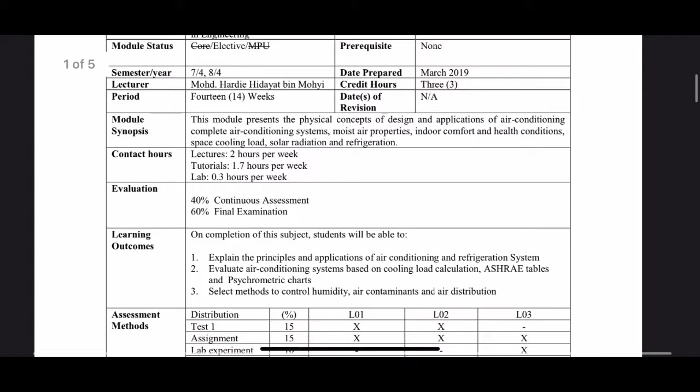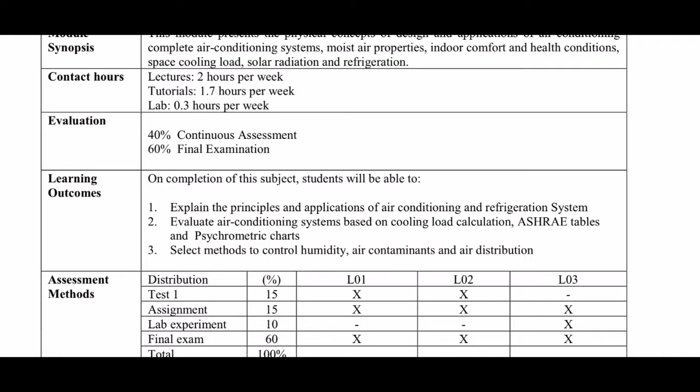Nevertheless, your learning outcomes are given there: 1, explain the principle and applications of air conditioning and refrigeration systems. 2, evaluate air conditioning systems based on cooling load calculations, tables, and psychrometric charts. 3, select methods to control humidity, air contaminants, and air distribution. This will be delivered via our lectures.

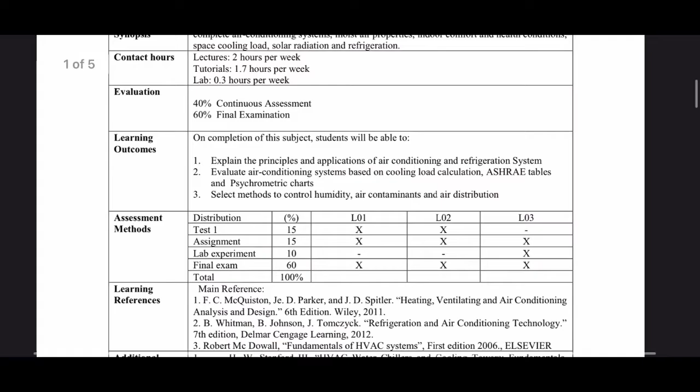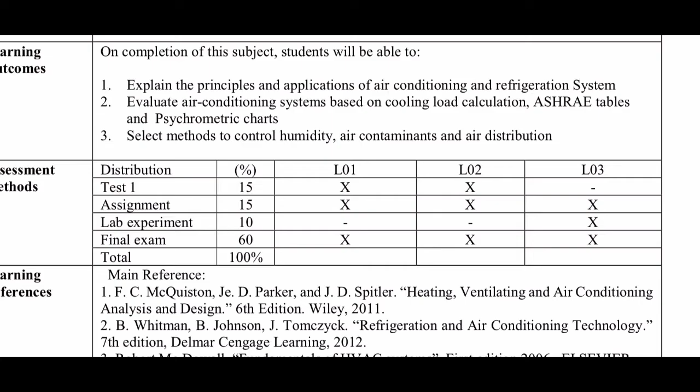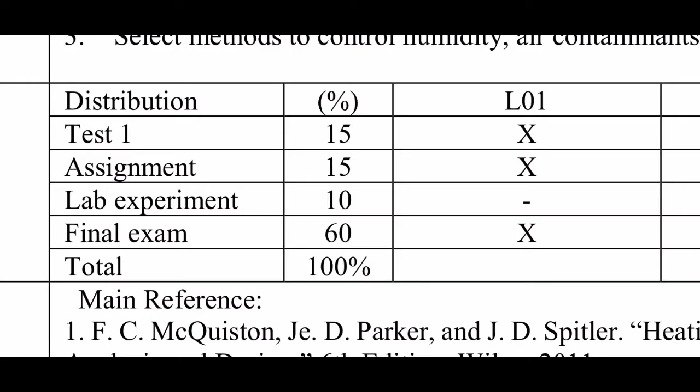You will have assessments. Now this is a bit tricky since I didn't change it. So what you are going to have is one test, one assignment, but this lab experiment here will be replaced by another assignment. So there will be no lab experiment this semester since you are the final batches. We will try to lighten your load by having another assignment. Both assignments will be done via group assignments, so test and final exam will be individual submission, of course.

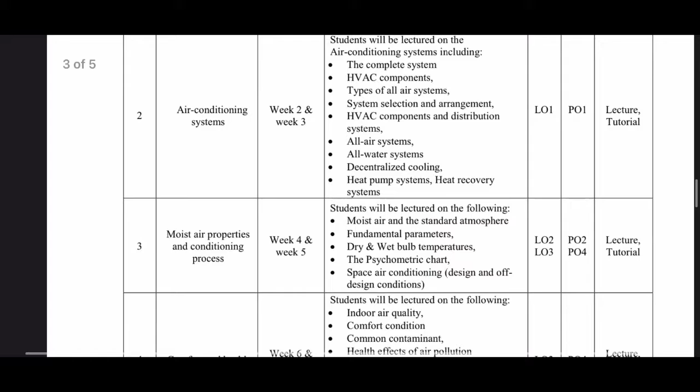These are the lecture topics that will be delivered, so you can see it's all there. I hope I can deliver as best as I can using the videos, and I do hope in April that we can meet in person, then we can discuss our lectures face to face.

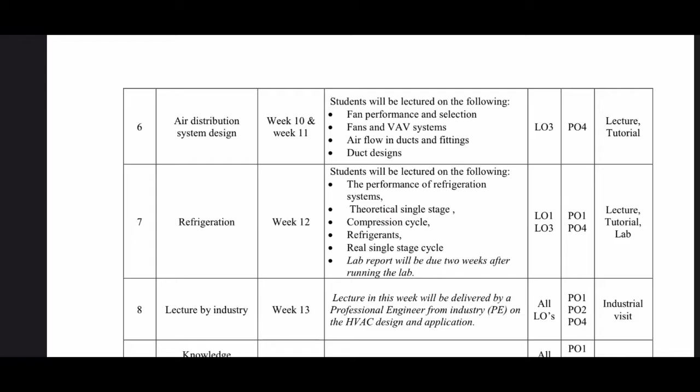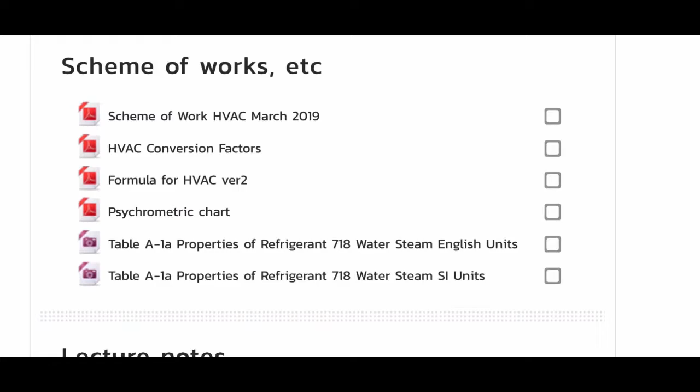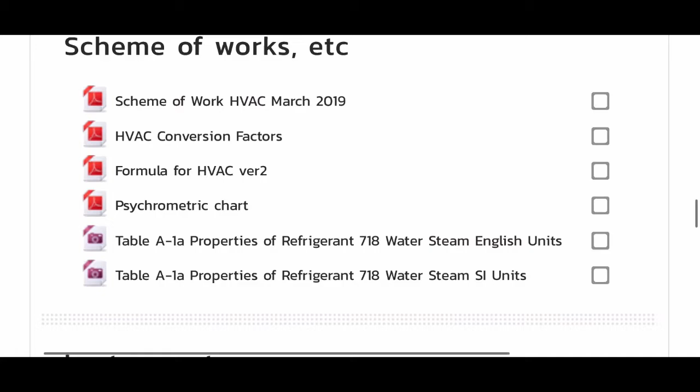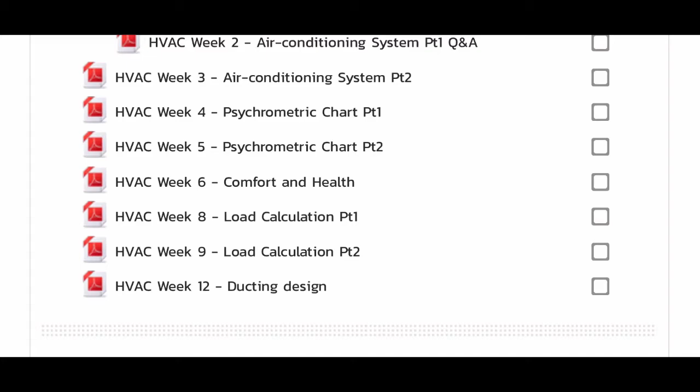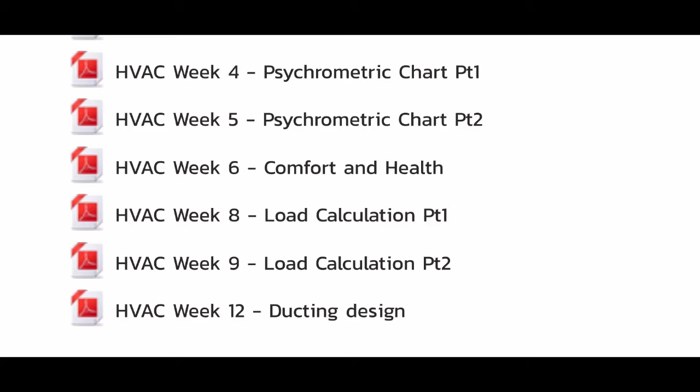These are my lecture notes. I'm going to put all this, week 1, 2, 3 until week 12, here. You can see there are a few missing weeks there. Week 7 we have a test. Week 9 to 12 there's a missing section because we might have some holidays there, but if there's no holiday, we're going to go straight ahead and hit all through these lectures.

Tutorials are hidden. I will unhide them one by one as we finish each week. So maybe in week 1 I will unhide tutorial week 1 and also the answer, and I will give a PDF of additional questions that you're going to answer and submit on a Google Drive that I'll post later. Assignments will be hidden as well until the time comes, you can refer to the SOW for when I'm going to give these assignments.

Also workshops, so don't worry, I will help you guys with your exams. I'll give you some workshops that you can refer to as a reference for your final exam, and also test questions will be uploaded when the time comes.